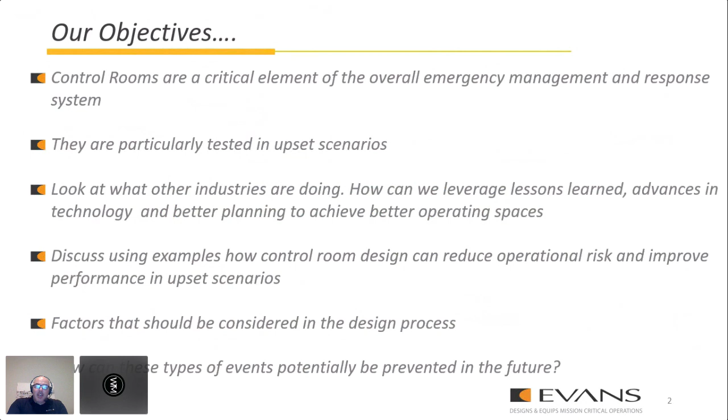And so we can discuss some of the examples of how control room design can reduce operational risk and improve performance in these upset scenarios, as well as some of the things to consider in the design process. So when we talk about lessons learned and what drives us, really there's unfortunately several examples that have tested how control rooms function. A lot of you are familiar with the Denise Amber Lee story, and a lot of you have listened to Matt talk about the Mandalay Bay shooting. An interesting perspective of that is what was going on within the comm center during these events. And these are the types of things we want to look at and analyze so that we can take lessons learned and improve these operations moving forward and in the future.

When we think about the dispatch operation, if you think about it like a pyramid, any comm center starts with obviously a building. There's power systems, there's communication infrastructure, all of these different things that need to be put in place. On top of that, there's things like IT systems, operational support, building management systems, so all these different elements that make the operation work. And then as you kind of zoom into the comm center, we consider things like radio systems, CAD systems, other software. But all of this infrastructure and all of these base systems are all geared around you, the dispatcher. This is what it's built for.

And so the idea is that dispatchers are the reason the comm centers are built. However, more often than not, the specific needs of the dispatcher are not considered until late in the design process. And what that forces is certain compromises, and oftentimes it leads to environments that are designed based on technology or budgets or other circumstances. But in an ideal scenario, this pyramid should be designed around the needs of its main customer, which is the dispatcher.

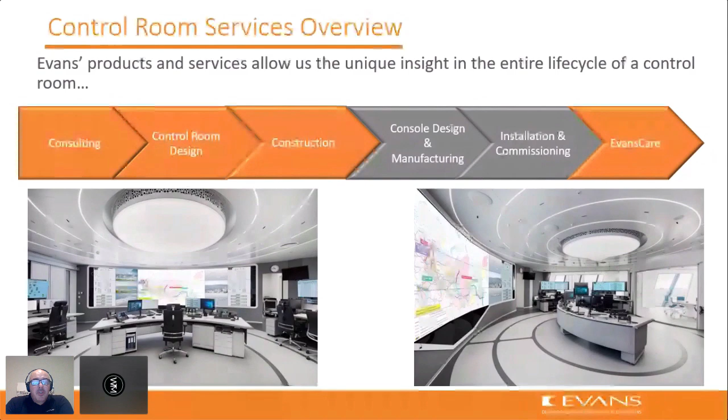center operation. We also service several different what we call market segments. The one thing that's unique across all of them is they all have 24/7 operations, and this allows us to cross-pollinate and take lessons learned and leverage some of the experiences we have in other markets so that we can bring thought leadership and the latest and greatest in terms of operations to our customers.

So when you think about approaching planning an ideal control room, you really have to think about considering all the different aspects that might impact the operation of that center. And early consideration really is key. So if you were to try to break it down, there's five general areas to think about when approaching the design of a comm center.

So the first one is physical considerations, and that's where you think about things like architecture. You know, your existing space. Is it a new building? Is it brownfield? So are you doing a renovation? Looking at your mechanical infrastructure, so your HVAC systems, filtration systems, looking at any regulatory requirements you might have in local jurisdictions, any infrastructure requirements such as power, data distribution, even fiber optic infrastructure. So those kinds of things.

The other important element to consider is technology. So there's core technology infrastructure, which are things like your communication systems, your CAD systems, radio, phone. But then there's also user-focused technology, and this is technology that allows the operator to be more efficient and allows them to have greater situational awareness.

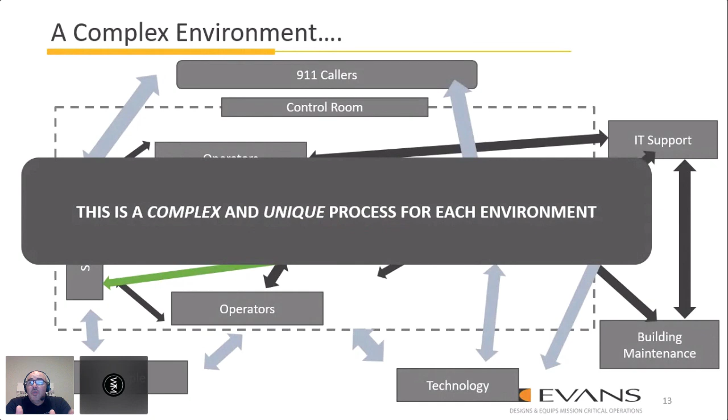Some of the considerations to look at when designing these centers are things like ergonomics, looking at your IT infrastructure, architectural facilities, your electrical network, your operational model. All of these different factors need to be taken into account to be able to create that ideal environment.

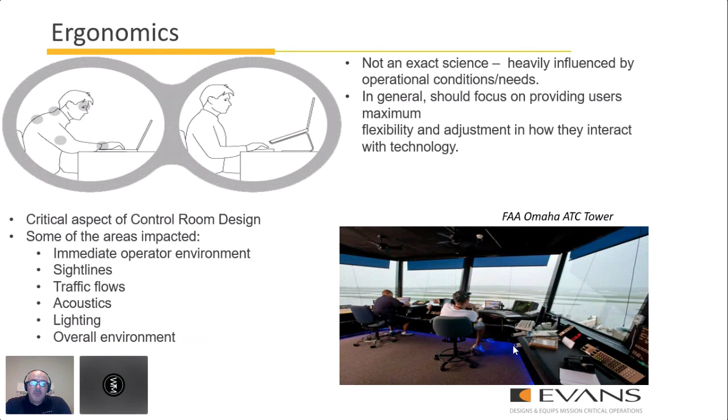And then you see the gentleman to the right who doesn't have an active flight coming in, sitting back with his foot up. That's the whole idea. We want to create that environment where you can safely change posture and be able to fluctuate between tasks and be able to relax your body.

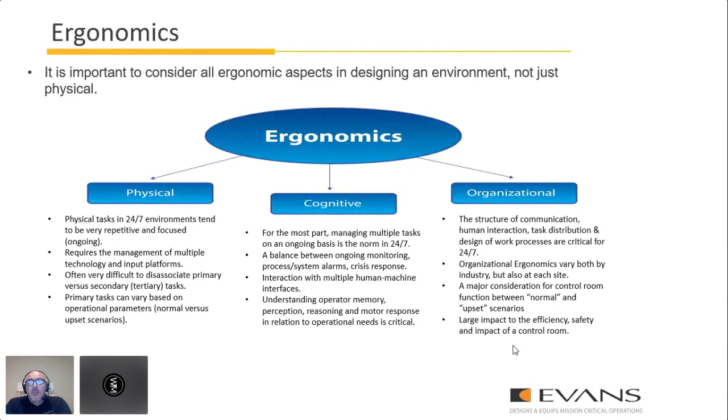The other thing to consider on ergonomics is most people think about physical ergonomics, but in fact, ergonomics as a science is broken into three major components. The first one is physical, and that's things like sight lines, reach zones, sit-to-stand features. But the other important considerations are cognitive ergonomics, which is really the ability of the human brain to process information. And then there's organizational ergonomics, which is really looking at the structure of communication and interaction. In a comm center environment, all three of these are extremely important and should be considered in the design.

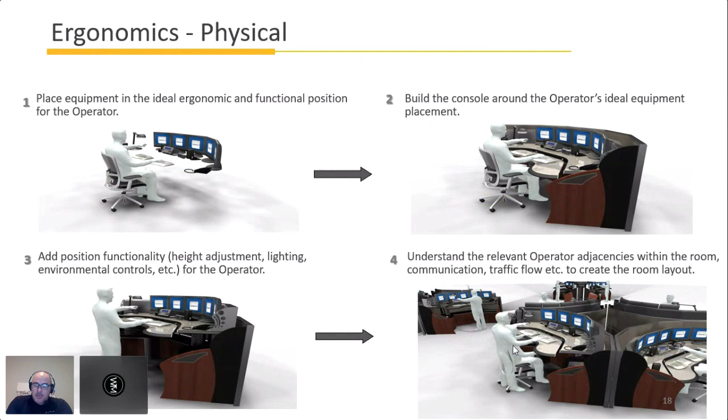So obviously, physical ergonomics in an ideal case would start with looking at all of the different equipment that an operator needs to interact with and placing it in the ideal position, and then building the operator position around that ideal location of the equipment. From there, adding functionality such as height adjustment, lighting, environmental controls, etc. And then you continue to move outwards and understand the relevant adjacencies, communication, traffic flow, etc. So really, it should start around the operator and go from there.

And so you can see in some of these examples where the physical ergonomics very much drive the design of the room. So everything is tailored exactly to the specific operational requirements in terms of physical ergonomics. Another very important element is lighting, because it mitigates operator fatigue. It certainly promotes alertness and energy levels, and it improves the overall environment.

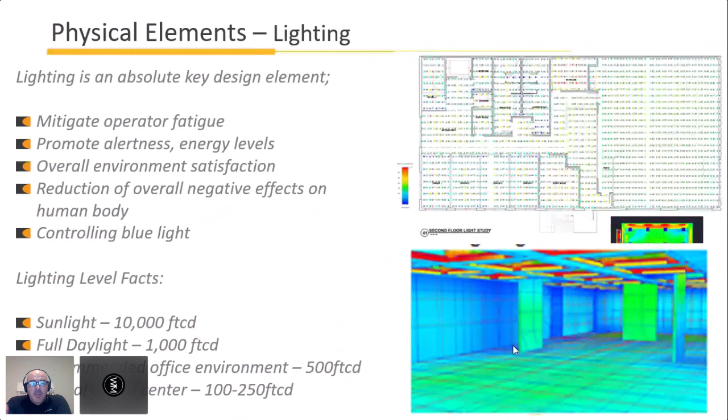So when you look at some of the facts on lighting levels, when you're standing outside on a sunny day, you're experiencing about 10,000 foot candles of light. Full daylight on an overcast, cloudy day is about 1,000 foot candles. Most recommended office environments are about 500. And unfortunately, most comm centers are between 100 and 250 foot candles. And I'll explain what that means. So this is probably what you're used to seeing in most comm centers.

Insufficient lighting levels really make it very difficult to create a healthy environment. And it really promotes decreased levels of alertness, and it becomes extremely challenging in shift work. And the reason I say that is because we all have something called a circadian rhythm. So this human rhythm is a natural evolutionary way that our bodies have adapted to the difference between night and day.

In other words, naturally, when we wake up from a sleep, we have our highest alertness probably somewhere around 10 in the morning. So our body's ready to go. Between 10 and 3, we have the best coordination, the fastest reaction time, everything else.

But then as the evening approaches, and this is through thousands of years of evolution, as it starts to get dark, our body naturally starts to release something called melatonin, which is what triggers our body to think about going to sleep. And a lot of this is impacted by sunlight because historically, up until 200 years ago, there weren't abundant sources of light 24 hours a day. So humans were naturally tending to go to sleep in the evening, whereas when you think about shift work, that's not the case.

And sunlight has something called blue light, and it does stimulate the circadian clock. And there's been significant research done on how it impacts you. Now, with LED lighting and the new lights, the source of blue light is now available throughout the night. And effectively, it's tricking your body into thinking that it's daylight. And this is starting to have some real implications, as research is showing, on the folks working in these environments.

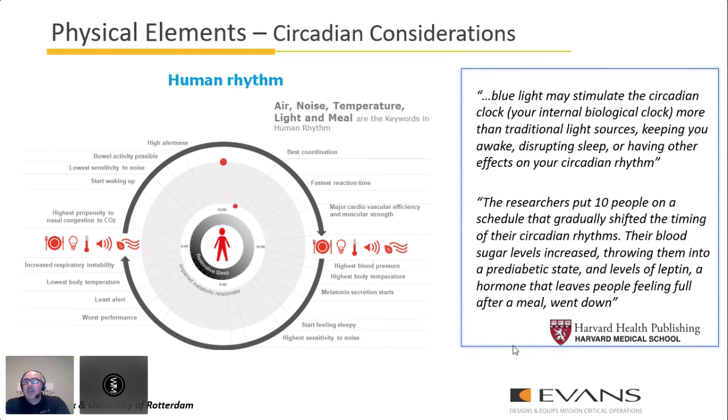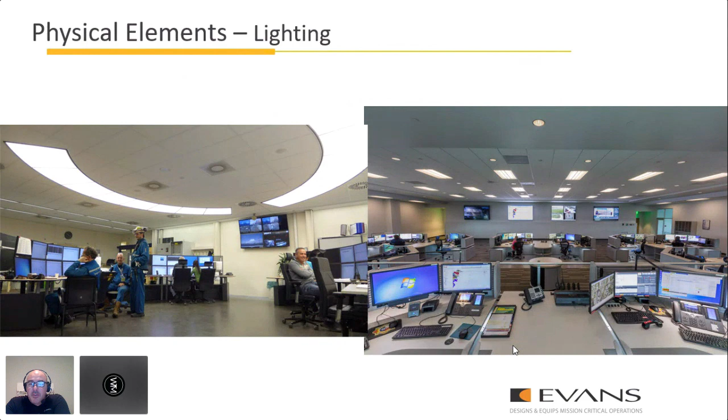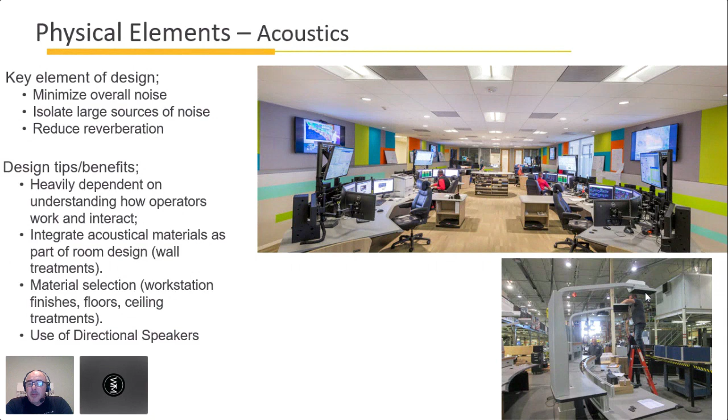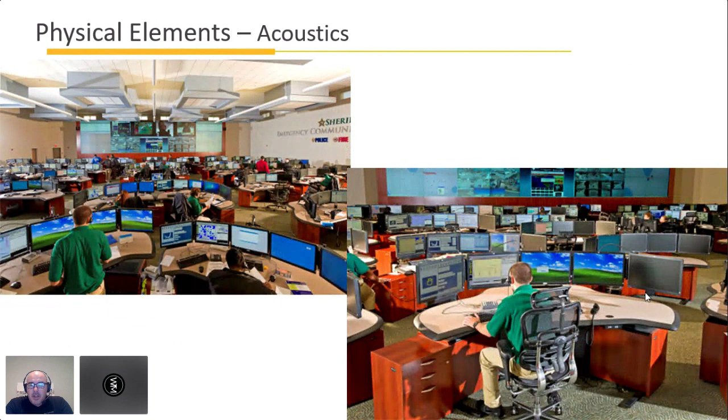So in terms of cognitive ergonomics, one of the primary things to look at is alarm management. And so what you want to ensure that's happening in your comm center is that you have the appropriate visual and audio systems to better break down and display alarms. So integrating alarm systems into visual cues really helps the overall situational awareness in the center.

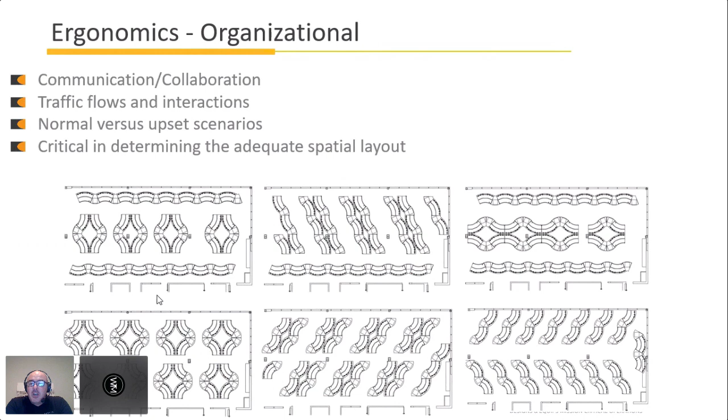In terms of organizational ergonomics, it's really about looking at communication and collaborations, traffic flows, and interactions. And what you're seeing down on the bottom page is just some different iterations of thinking about traffic flows and layouts within the room. And this is not so much from an architectural standpoint, it's much more from a communication and workflow standpoint. So being able to explore these early on is extremely important because you can anticipate some of the scenarios that the comm center is going to experience throughout its life cycle.

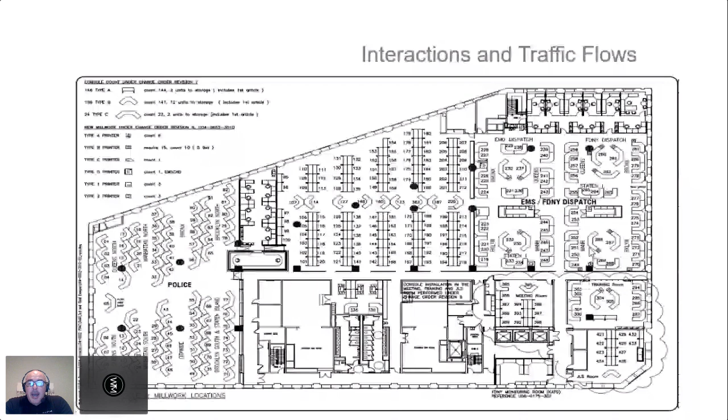And so I'm just going to focus a little bit on the EMS side. So you can see this layout. You have the call takers, their supervisors, and then this is EMS dispatch. So you've got Bronx, Queens, Brooklyn, Manhattan, and Staten Island. And then these are the supervisor positions, and then you have the dispatchers.

So the normal workflow and communication in this layout is, the dispatcher supervisor has a direct view of the dispatchers. They also have a direct view to the call taker supervisors and so on. So there's a visual line of communication that is important, because in a major event such as September 11th, when you lose communication, having verbal cues is critical. So that's part of the reason why the room layout was done like that.

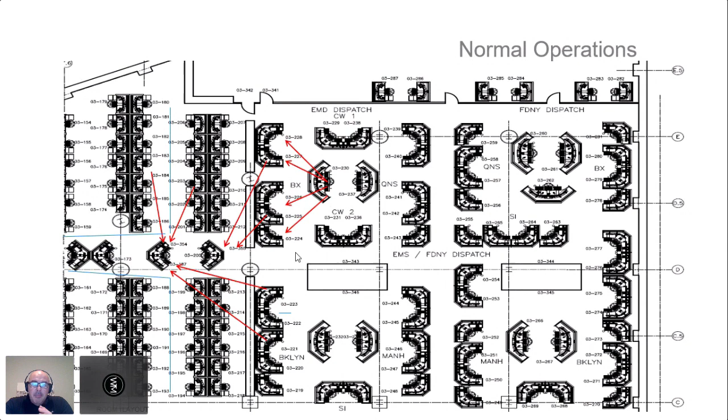But another important element to consider is what happens not just in normal operations, but in upset scenarios. So how does the traffic flow pattern and the communication pattern change? So if you think about a major event that perhaps happens in Brooklyn that has mass casualties, instead of everybody being in separate buildings, now that they're together in the layout of the center, the supervisor can actually pull in resources from different boroughs, not just electronically, but also visually and verbally within the center. So they can essentially take control of multiple resources outside of their own. And that's the whole idea of being able to design the space to anticipate some of these major events.

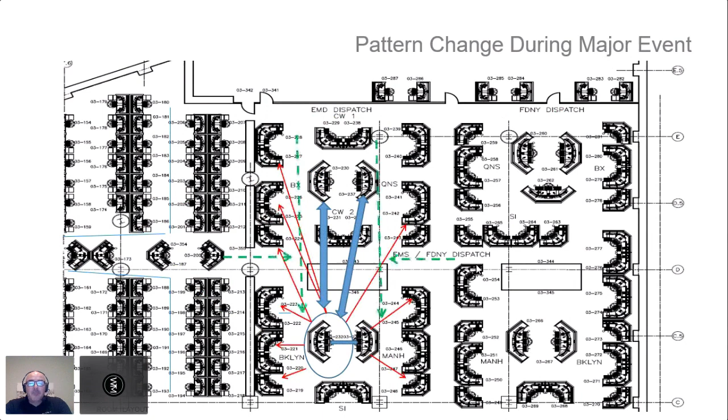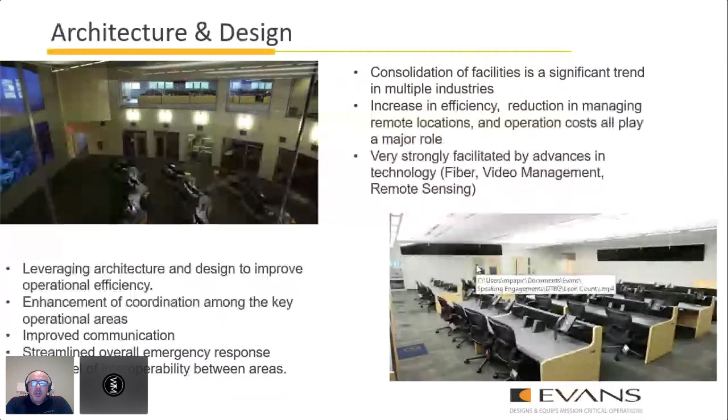In terms of architecture and design, as you all know, consolidation of facilities is a significant trend. So early on in the architectural stage, thinking about some of the efficiencies and operational alignment is extremely important. So this is an example of Leon County, where you have a traffic management center, emergency call center, and EOC training center all consolidated in a single facility.

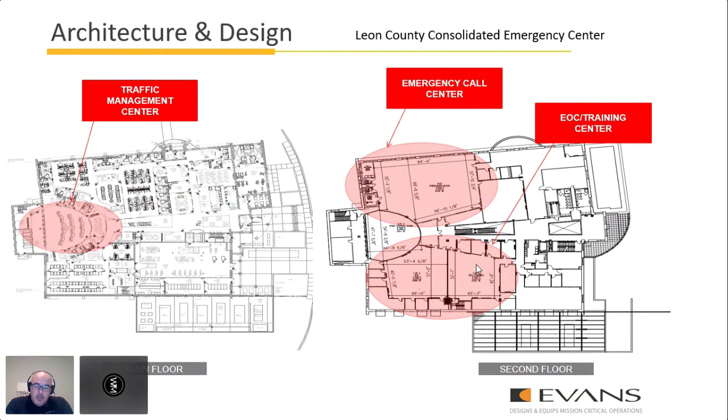So obviously there's multiple benefits with this. You have a single physical security envelope. You have a single server room infrastructure, power infrastructure, building infrastructure. So there's natural efficiencies with that. But when you think about the 3 areas that are here, an EOC, a 911 center, and traffic management center, in a place like Florida, having these operationally together makes sense, because obviously one of the biggest issues in Florida is hurricanes.

And any time that an evacuation is activated, it's these 3 that are key. So, the 911 center, obviously the traffic management center, and the EOC is activated. But you can see this building design that,

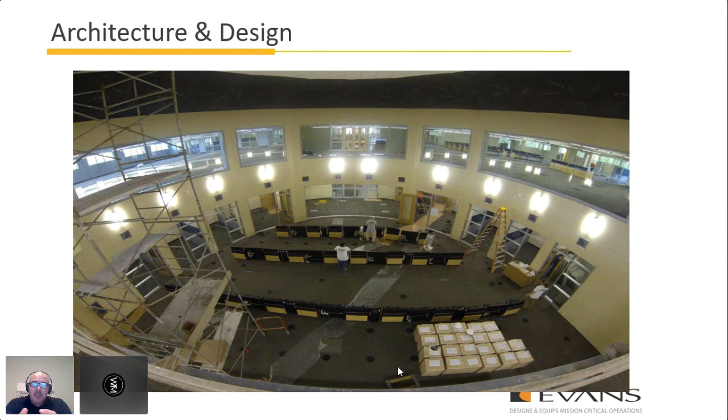both the 911 center, which is on this upper left-hand side, and the Emergency Operations Center have clear glass to look into the Traffic Management Center, which has a very large display wall that runs along the bottom here. That allows all three functions to have a full view of what's going on the ground, because they're seeing the camera feeds from the evacuation routes, and they have much better situational awareness. So there's a lot of benefits in being able to consolidate a lot of these functions together.

So next I'm going to talk a little bit about technology. So one of the things that's really evolving within mission critical facilities is AV technology. And traditionally, AV technology was thought of always as the large screen displays, but in reality, it's evolving to be much more software-based approach. And it really has come a long way in terms of flexibility and how you display content and consolidate content. Also, there's increased demand for video content and data inclusion coming into the center.

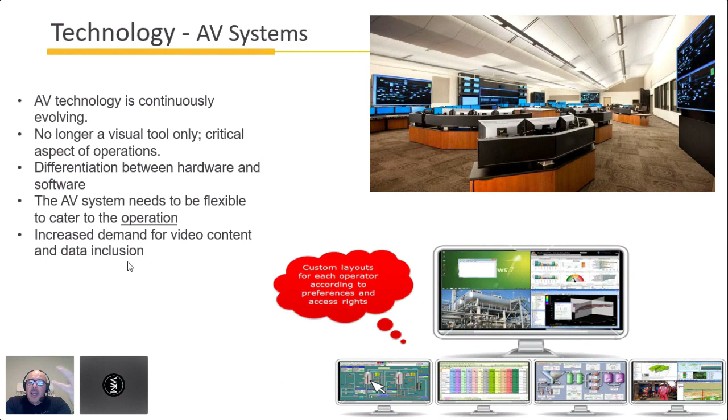So whether you want to observe real-time traffic information or camera information, or any other medium of information coming to the control room, you need to have the video systems that will allow you to manage that better. It also allows for much better collaboration within the control room, but also outside of your comm center, within the EOC, with folks on the ground. So all of this content, if planned properly, can be very easy to share and very flexible, which gives you a significant operational advantage. And it allows the dispatcher to be a lot more proactive rather than reactive.

Having the right infrastructure of data communication also allows you to better utilize the backup facilities, and it takes them from being purely backup to giving you the ability to design the facility to be a fully redundant operational backup site. And it can be operationally identical to the primary site, and it can have common position configuration.

So when you think about the age of COVID, the example of New York 911, they have one of these fully replicated sites. And so when they needed to, they were essentially operationally able to achieve 50%, call it social distancing, immediately by having half of their resources in one site and half of their resources in another site. So it provides significant benefits from that perspective.

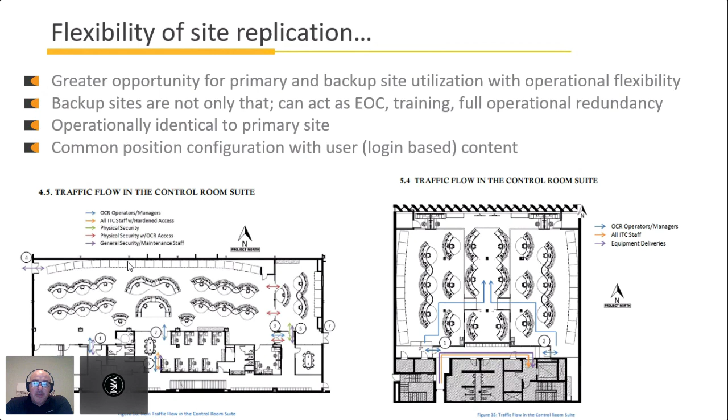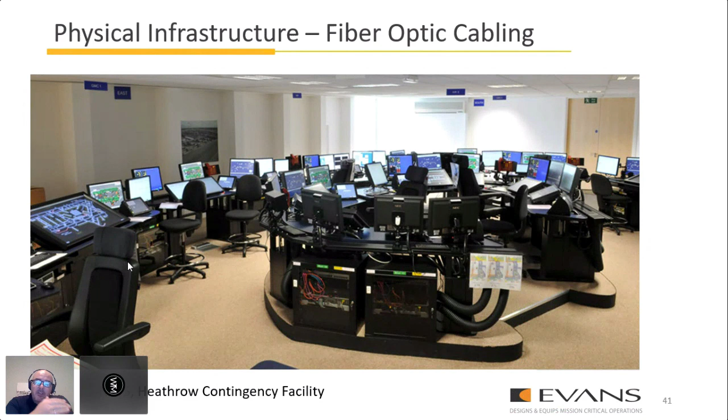And this is just an example of how far some of these technologies have evolved. So this is a backup air traffic control tower for Heathrow Airport in London. So the one unique thing you'll see here is it has no windows, which is odd for an air traffic control tower. But the reality is that the technology and the fiber optic infrastructure are so well evolved that it allows them to be able to track incoming and outgoing flights pretty much digitally without even requiring a window. So that just gives you an idea of how far the technology has evolved.

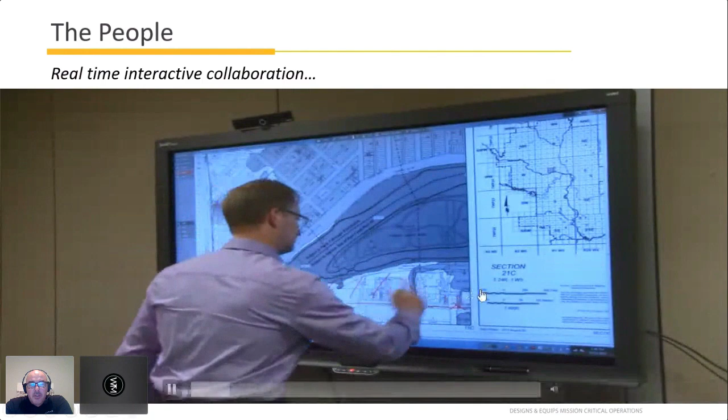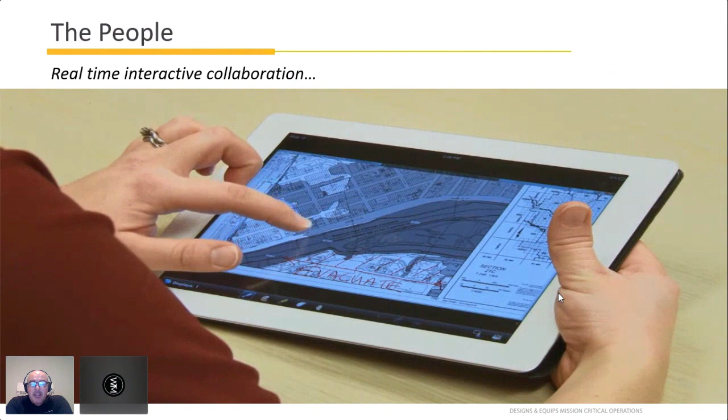In this video example, I just want to show you a simple way of incorporating technology into your operation. So this is an EOC during a flood event in Calgary. So they're using a smart board where they're giving instructions to the broader team. Now, the folks out in the field, they have handhelds, which essentially see the real-time information that's being put on the smart board. In addition, those users with appropriate permissions can interact back and forth visually. And as you can see, this is a significant improvement in the communication process.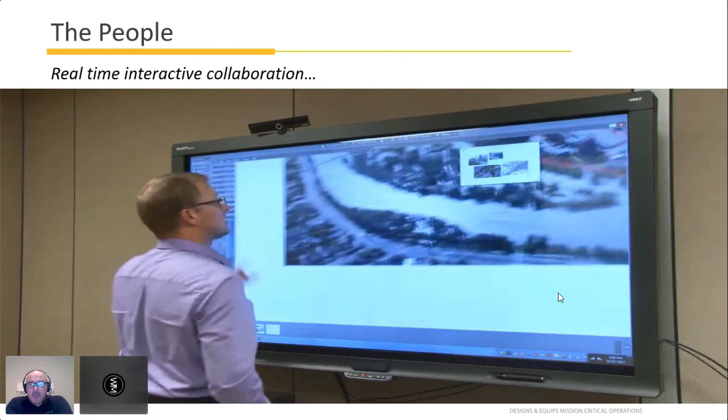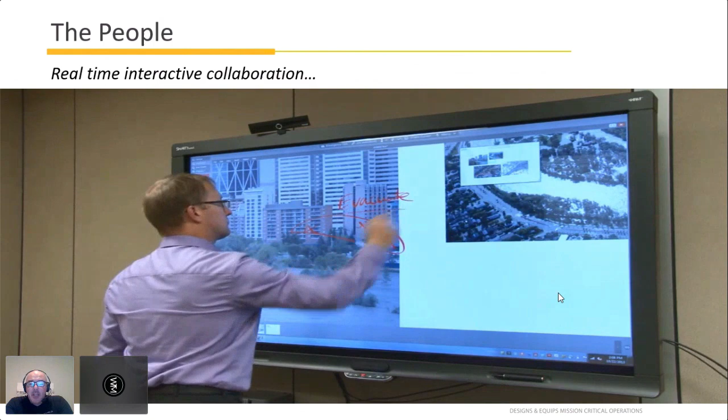It also allows them to use real-time video of the situation. So you can see in this case where the water is rising, where they can identify buildings, not just by building number, but also visually, and say, these areas need to be evacuated. So it just helps the overall communication process. So the idea is to have that kind of increased level of collaboration to be able to address some of these situations more effectively.

And I want to talk a little bit about the people. So the workforce profile that's now coming out of colleges and universities is changing significantly, as most of us know. In particular, younger folks are much more accustomed to being able to track several different pieces of information on a single monitor, versus, let's call it the older generation, which is used to having one monitor for one source of content. And this is starting to have a really big impact on how we design and think about facilities.

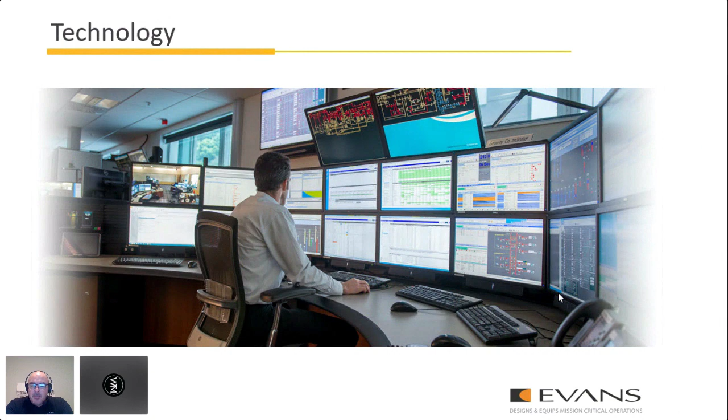So when you think about a configuration where you have a significant number of monitors, where this is starting to migrate to is taking this type of content, and you can see that you have multiple monitors and multiple keyboards, and being able to consolidate them into large displays with essentially a dashboard approach, where the critical views that you want to have are on the two large screens, and then a lot of the other monitors are on the side here that you can simply click on to enlarge, or you can create your own configuration and views.

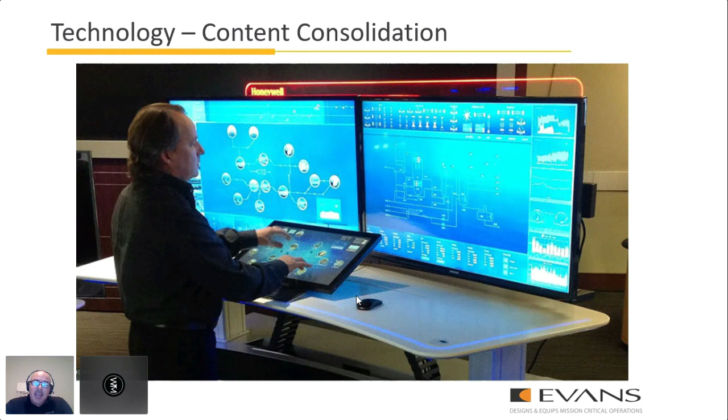So instead of having 8 or 10 monitors, you can have two high resolution screens where you can digitally create your own, if you will, pixel space or view space. And this has some significant benefits to the operation. Also, with the use of hardware-based KVM and PC consolidation, it allows you to move away from multiple keyboards and be able to design a significantly more optimized operator position.

So one of the things to consider is looking at how the actual positions are structured from a technology standpoint. A typical position will have multiple PCs feeding the monitors, and then it'll have multiple keyboards. The first step is to think about consolidating those monitors in what we just talked about, the two large screens with the four different feeds as a dashboard. And then also thinking about having a smart keyboard, which allows you to toggle and move between different inputs, but use a single input device or a single keyboard.

Then the other step is to look at taking those PCs that are at a local position and simply putting them into a side room. Now, again, it's not changing the boxes, it's just changing their location. If you were to put them in a separate room, there's two immediate benefits. One is heat, the second is noise, and I guess the third one would be maintenance, because you can maintain all the PCs without actually having to come up to the operator position.

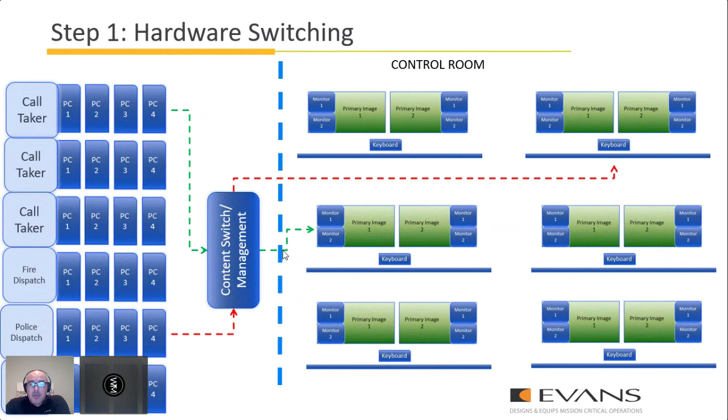The other thing that this provides is it allows you to start including different types of inputs into the room. So whether it's CCTV feeds, live media, information from other agencies, traffic cameras, or any other source of feeds that you can allow into the control room, you can manage them through this content switch. It also allows you to put in a video wall. So whether that's basic flat screens that you would buy at Best Buy, or a more sophisticated video wall, the point is that you can collaborate and share content.

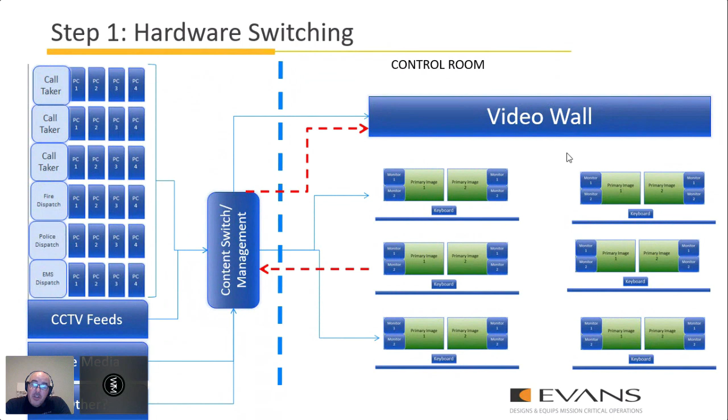So anybody within the center, for example this position, could choose to display something on a common video wall because there's an incident happening. They can very easily push that image to the wall so that the entire center can see it. And not just the center, all of that content through this switch can be replicated to an EOC or other agencies. If you're working on a major incident, you can move a lot of this content around. It can be fully replicated to a backup facility, or it can go to field personnel. So looking at this type of infrastructure early on can provide significant benefits to your operation overall.

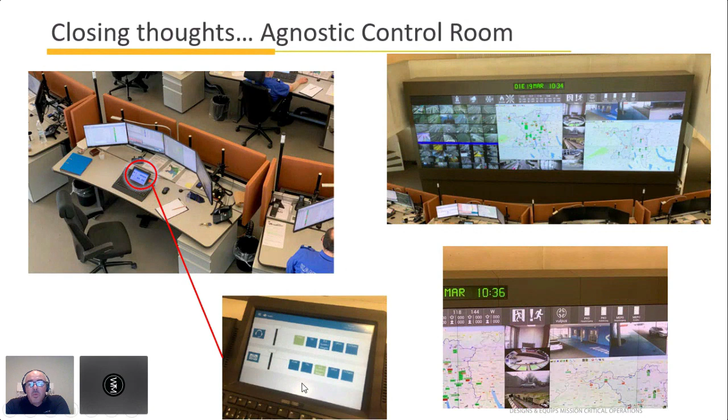And so you can see here kind of, these types of keyboards that are being used are not just keyboards, but they also have a full function screen. So you can control your audio, your radio access, you can control what you're seeing on the screens. So there's significant benefits to it.

And of course, we're all living in kind of a new reality, and this kind of global pandemic has really elevated some of the questions surrounding operational integrity and risk in comm centers. There's a lot of new ideas that are happening, and thoughts on operations. We've talked to several directors of comm centers whose life is not easy right now. I mean, they have a lot to deal with and think about. But they're thinking about things like social distancing, interactions and traffic flows, building access, the physical building environment. So are the HVAC systems prepared to have adequate ventilation? Screening, how is it done?

And then things like redundant sites are starting to really take on a different level of significance, because they're no longer seen as kind of the dusty backup sites, but a lot of folks are seeing the value of having a fully redundant site that you can run an operation on a long-term basis from. There's impacts on layout and occupancy. There's different thoughts on remote operations. So there's a lot of things going on, but to kind of try to summarize them, there's a lot of things that can be done both immediately, but also long-term.

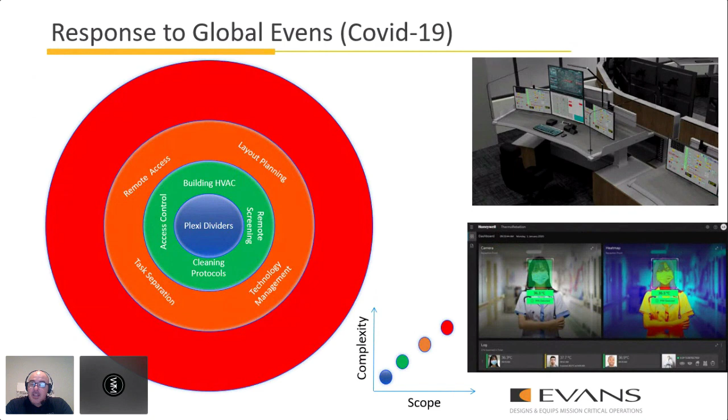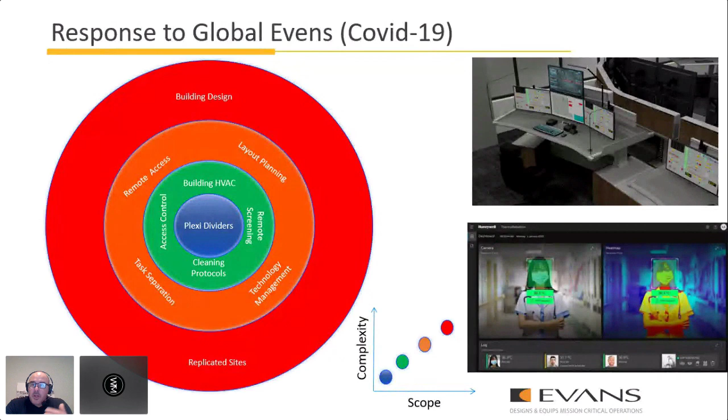And then as you become more complex, folks are starting to look at things like remote access, which is very much tied to technology. Layout planning, task separation. So who needs to be in the comm center versus who can be in different facilities, technology management. And then those that are kind of in a position to plan new centers, they're starting to think of risk mitigations based on building design, replicated sites. So it starts from kind of simple complexity and scope, and it kind of grows depending on where you are in your design process.